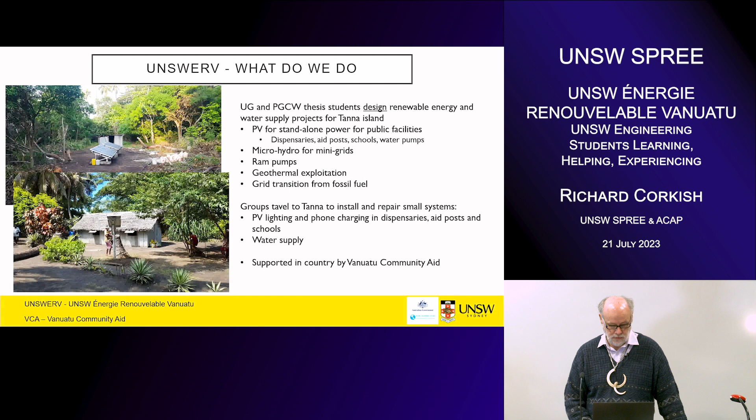And we've dabbled a little bit in the hopeful future transition of the diesel-based grid on that island away from fossil fuel. So I'm going to give you a bit of a slideshow, really, lots of photos and not much words about what we've been doing over those years.

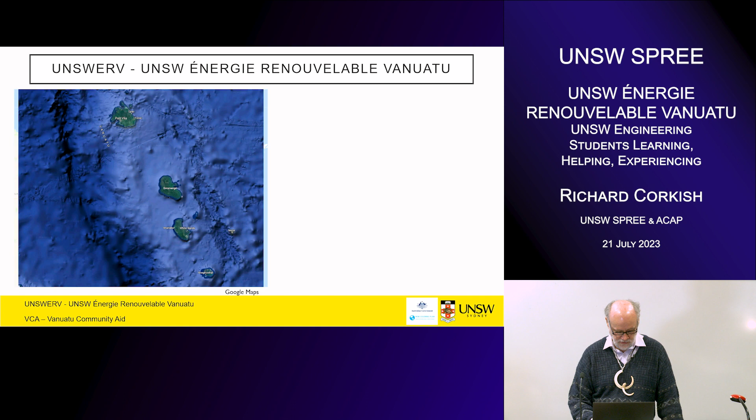So the island we're talking about is up here in the Pacific, Vanuatu is sort of between New Caledonia and Fiji, about the same latitude as Townsville, where Tanna is. That's the little island - this kidney-shaped island at the bottom here. We've got here on the west coast, much drier than on the east coast, because the prevailing winds bring lots of moisture to the east coast and particularly the southeast of the island, so it's very wet there.

The grid is only on the west coast, and most of the island has no electricity grid at all.

This island is 40 kilometres long by 19 kilometres wide, 550 square kilometres in area. The highest point is in the southeast of the island, at 1,084 metres.

Those prevailing winds I mentioned come from the southeast and bring lots of moisture, which gets dumped around that mountain, around those mountains really, and a rain shadow forms on the west side.

Very beautiful, we love to be there. It's just a glorious place to be. It's a South Sea island paradise, but it has its issues.

The sort of projects we've been doing is illustrated here. This is our students putting second-hand solar modules on the roof of an aid post in one of the villages. That village is Saka, I think, from memory.

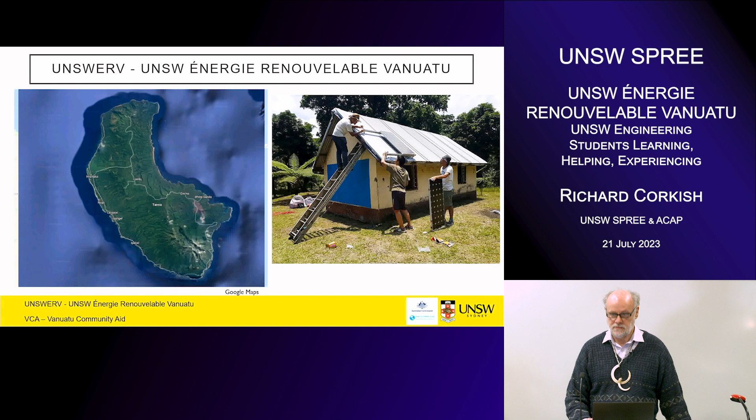So avoiding complex electronics like inverters is wise if we can do it, and so we can do basic phone charging and lighting without going to AC and high voltage. It's also intrinsically safe as well.

I think I've already done that bit. Another aid post.

We get into the local culture as much as we can. This is a festival that is only held every 5 or so years, comes with little notice to us in the West, but it's very exciting, a 2-day festival that is as colourful and as life-filled as you could dream of. We climb the volcano, have a look inside.

That volcano's gotten very excited in the last few years, and it's been quite devastating to the communities who live close to it, because it's been dumping ash on their gardens. Malnutrition has been an issue, along with all the health problems that go with that.

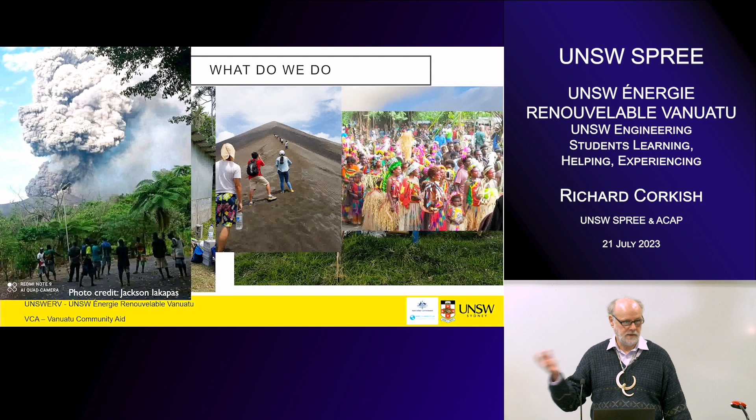It's driven a lot of families to move to Lenakel, the main town, in much bigger numbers. So it's sort of driving people out of the rural villages.

So we engage very closely with the local community, and we make good friends. And primarily what happens through this is the students learn. Through that engagement, they also learn to get their hands dirty, to build things with their hands, and they learn to experience the pride and joy of making something work that's really useful to people.

This is our first project, back in 2007 and 2008, in the little village of Lowen. You can see we put roof guttering for water supply, some tanks, and over here a PV module, supplying a lighting system. That's a project that was started by Anna Bruce, and I sort of picked it up and took over it.

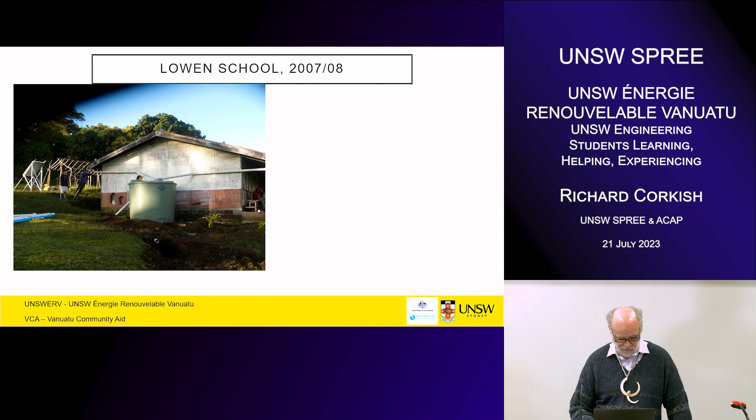That PV module lasted quite well until 2015, when Cyclone Pam was unkind to it, and we've since replaced that lighting system with an upgrade. The local people were very appreciative, and we had a little ceremony at the end there.

From that we asked around and made some more contacts. We'd been introduced by Mary O'Malley, who used to work in the media office in the Chancery here, and she'd had a lot of experience on this island and had a lot of good contacts, so she was able to introduce us to people who allowed us to learn about projects and learn what was needed.

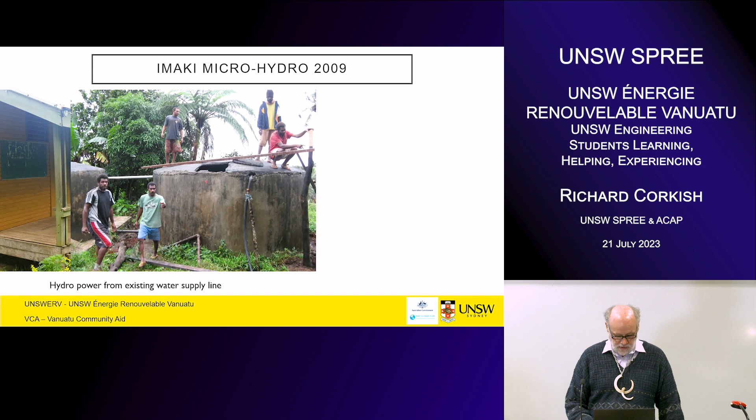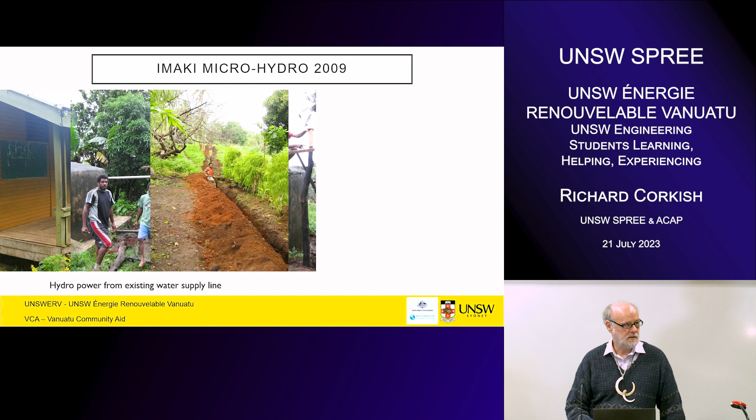So he and his colleague the following year, Eden, who's also active in 5B, they built a hydropower system, and that gave 24-hour, 7-day a week power with no nighttime shutdown. So a small battery is a big advantage of that over solar in cases like this.

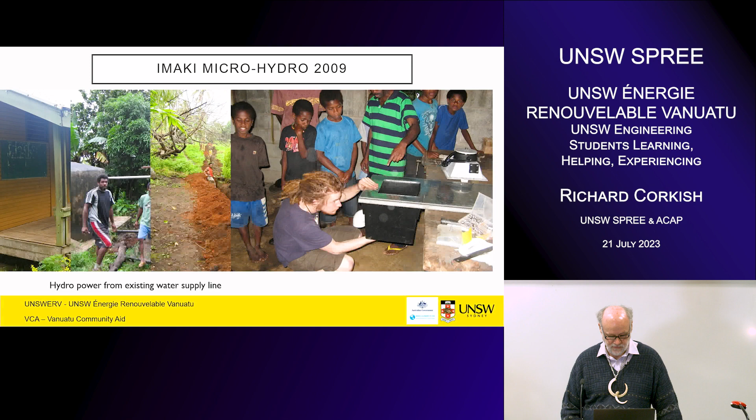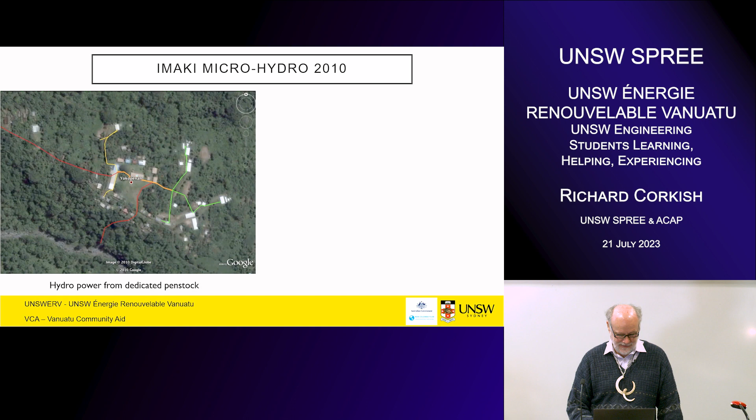That worked very nicely until Cyclone Pam. So they built a mini grid based on that hydropower, distributed to the two schools, the secondary school, the primary school - and really, just an aside, that secondary school has got to be the most beautiful campus of any educational institution in the world, it's just lovely - the medical clinic and the nurses' quarters as well, and a couple of other places. So it made a big difference to that place.

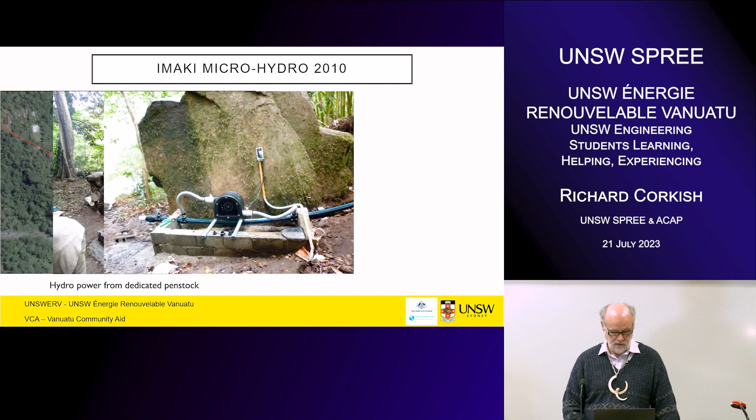So Eden came on the next year, and they actually did a different, slightly larger hydropower system that wasn't dependent on the existing water supply line. They put in a dedicated penstock, and that's the turbine that was running from that, and the water that comes out of that turbine was just returned to the river. So that's just below the village.

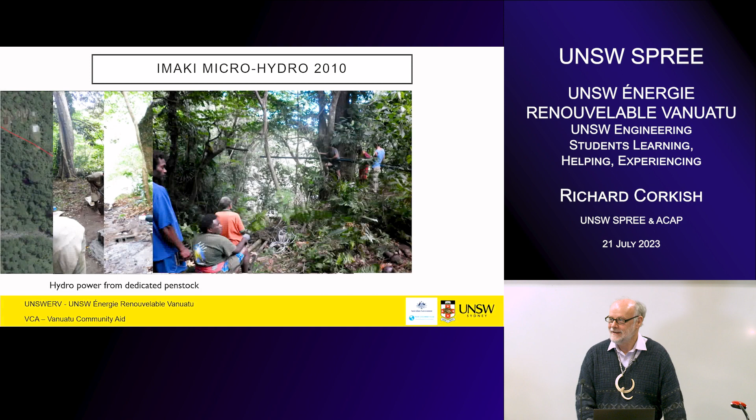So here we see installing the pipe over a chasm, one of the many chasms along the way. Very rough country, very difficult country, but it went very well. So there's Chris and Eden, and I hope they remain very proud of the great job they did there.

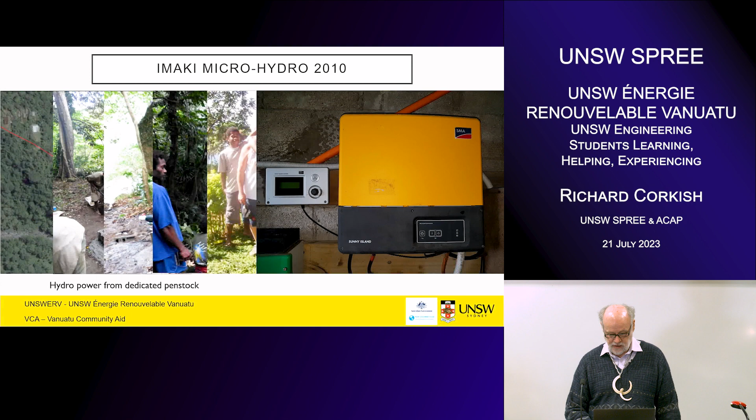So those SMA inverters have been through hell, really, with cyclones and unroofed buildings, and still we're hoping next year to put them back into service in another place.

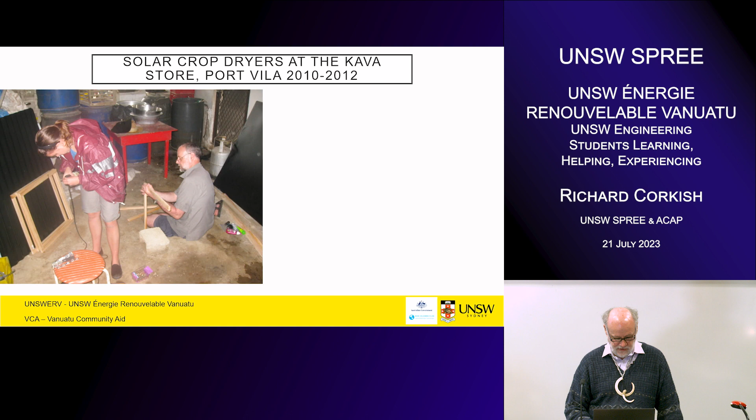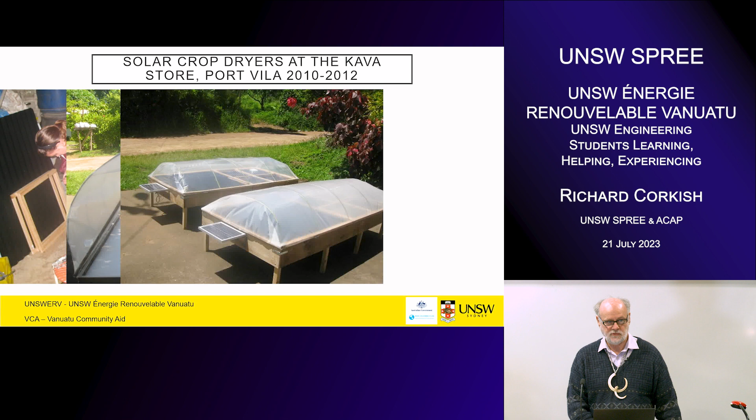This is me and my daughter then - my daughter is still my daughter. We were doing solar crop dryers in Port Vila, now on a different island - the main island was our next project, which we did in 2010 through to 2012 with a master's student. That's my daughter there. So we built two solar crop dryers that were used by one of the businesses there, the Kava store, to preserve local Pacific fruits and nuts.

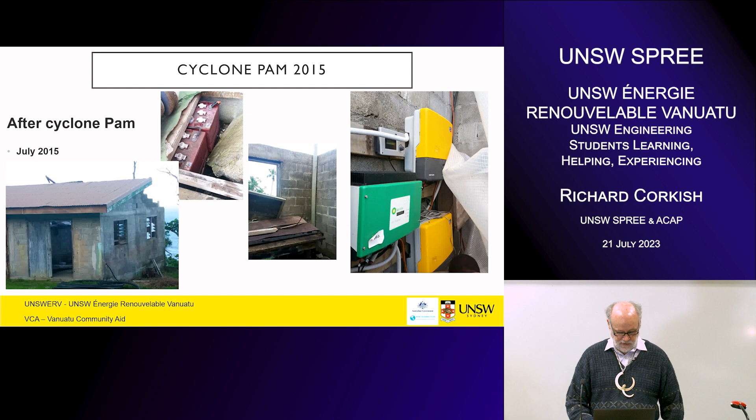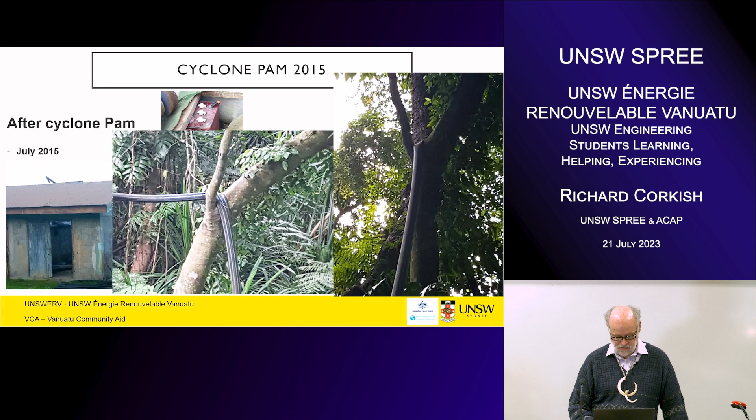It lost the windows, lost the roof, rain over everything, and the hydro was not working for several years after that. It put trees down over our pipe, so we did a survey there a few years later, and I think there were 13 damages to the pipe that were all very serious. It got to the point where we thought we'd have to completely start again, and we struggled to find the resources to do that. There's our penstock that used to be strung across a valley, but now it's just broken.

So set that aside. We went back to doing the lighting in dispensaries and aid posts again. This is at Iquaramanu, just on the south side of the volcano. I used to really enjoy getting water out of that particular water tank because it's very crisp, sharp, cold water, nice in summer—until I found out it was actually full of acid from the volcano, which gives it its crispness. So I suddenly stopped drinking that.

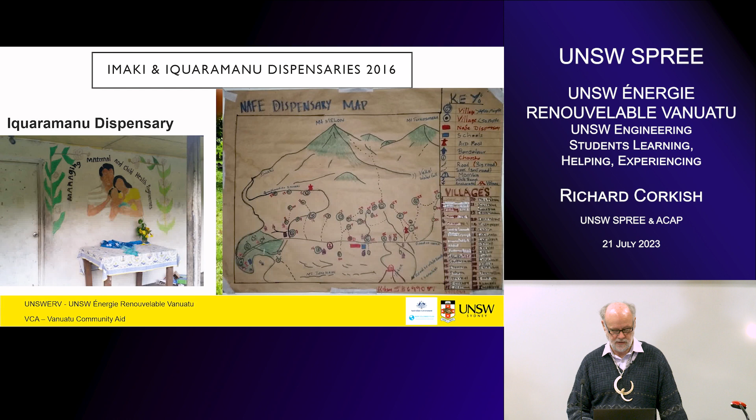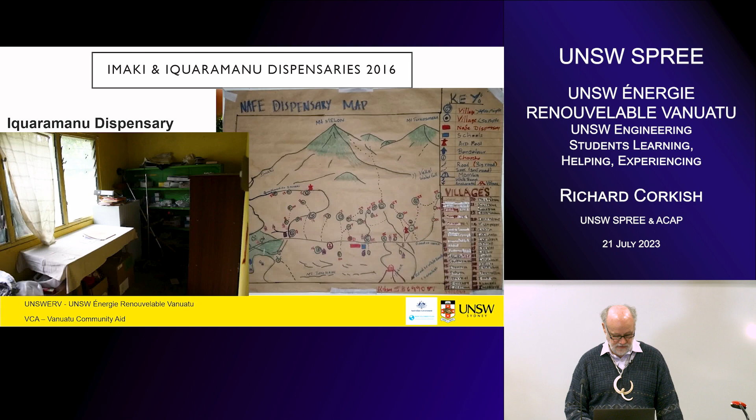So the community came together there. That's worked for many years with our lights in that building. That's the map inside that building showing how they keep track of the villages they service and where people come from. People come from many kilometres away to get health services and to have babies at that dispensary. But it's not a very well appointed place—it's very basic. Lights make a big difference.

Another one on the south coast, Quaraka. This is the common sort of building we're seeing as the village aid post. It might have a concrete floor—that one does. Sometimes they have dirt floors, but very basic services. So here's a picture on the left of one of our students installing a distribution board for our DC supply, 12 volt DC supply for lighting and phone charging there.

That's the building there amongst all the coconut trees, right on the coast—absolutely blissfully beautiful place. So that's us walking along the beach to the local creek so we could have a bath. There's lots of scenic benefits at the place.

We've done some training of local people a little bit, as the level of mathematical knowledge and understanding is quite low in the community, but it's getting better for the younger people.

So we've taken some second-hand solar modules that we took off a school, donated from a school in North Sydney, and we've shipped them across. That's our sort of bread and butter for our projects—we're working our way through them as we do projects. So that's in 2018, and we've still got a few of those left.

So at Imaki School, we did some basic testing of those modules to check them after the shipping, because the shipping can be a bit rough on them, and we got the students involved in doing that.

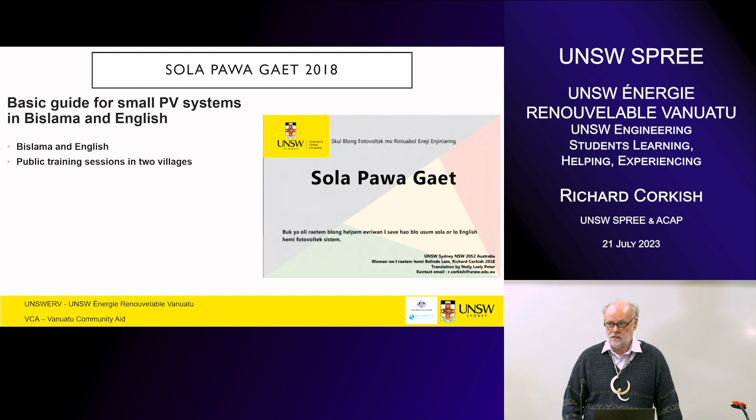One of our students, Belinda, developed a solar power guide for the local people in Bislama, the local language, and in English. This addresses some of the very basic issues.

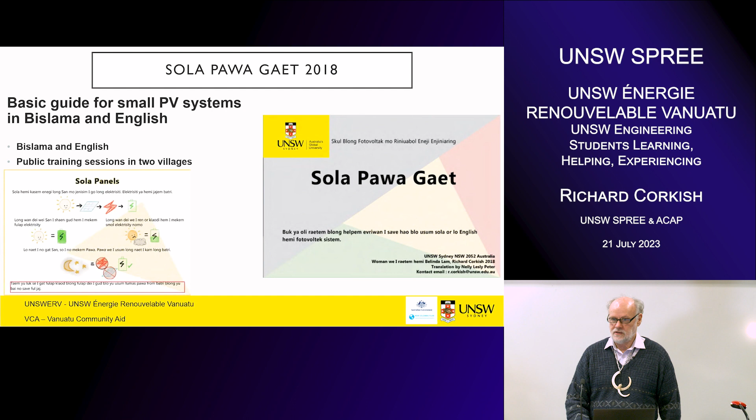There are lots of little privately owned solar power systems, but they tend to not be installed very well or optimally—the wiring is too thin commonly, and there's insufficient understanding of what's needed to make them work well. There's also an expectation that you can't do anything without an inverter, which we're trying to undermine by promoting our DC systems. So we're addressing those basic understanding issues—what does an inverter do, and when do you need it, for example.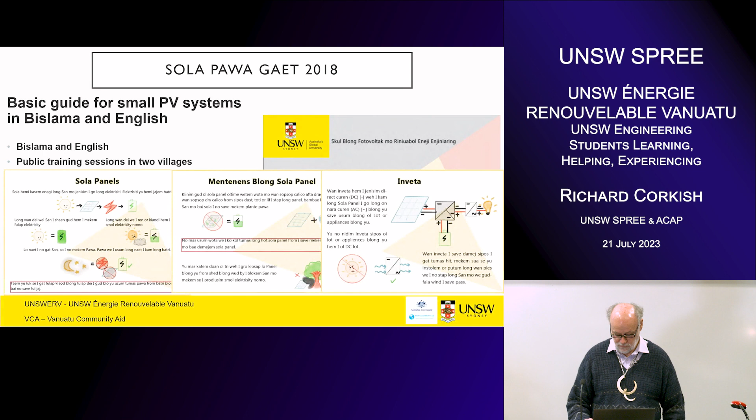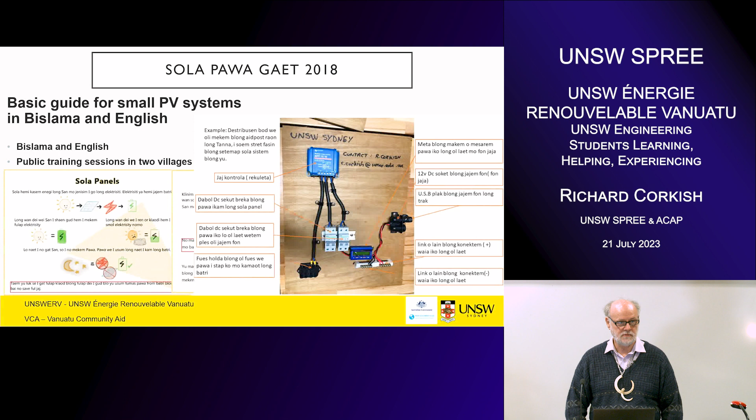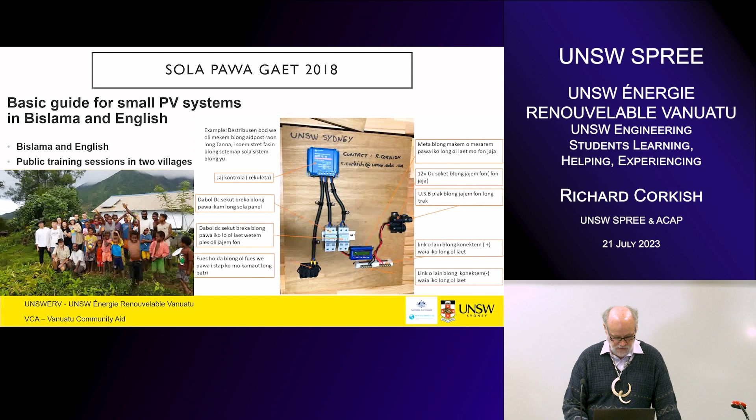That's one of the little boards that we make here now at UNSW. We ship them across and install them—we prefabricate those here. That's presented in both Bislama and in English.

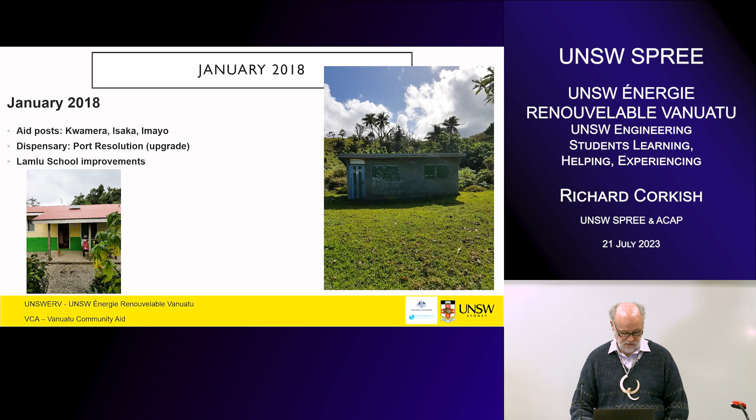Back in 2018, some more aid posts—a dispensary at Port Resolution. We've seen that picture before, I know—and a school at Lamlu as well.

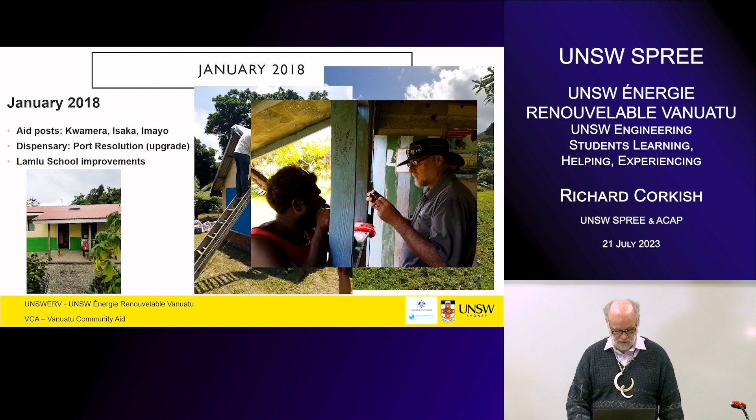Lamlu is one of the Catholic mission schools in the middle of the island that we've been doing a lot of work on, and had lots of goes because our budget has been too limited to do what we really need to do. So we've been working little bit by little bit, classroom by classroom. We've seen that one before too—this little picture here is at Lamlu School.

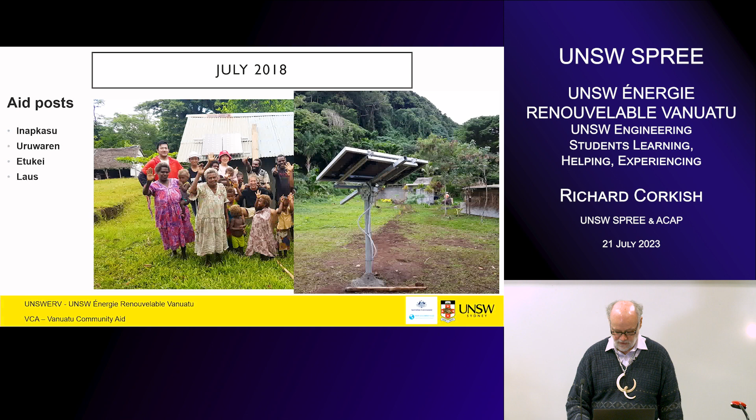More aid posts later on. So this one here, we needed to—this is right on the south coast of the island. We couldn't do the cheapest option, which was to put the PV on the roof of the building, because of this mountain in the background where the sun is blocked out until very late in the morning each day. So we had to find a compromise location that was a bit less shaded. But getting the hardware for the mounting systems there was incredibly challenging and expensive.

Another aid post, that's Etukei, right on the very eastern end of the island, and this is Laus, which is right on the northwest of the island, the very far side. Over the years we've made lots of friends and got very engaged with the community. Our work, although very small and low impact, has been much appreciated by the local community.

Back in January 2020, that was the last time we went before we had a bit of a break, we had a ceremony where we were honoured and effectively included in the local community in a way that was very honouring. I'm wearing my tusks, a great honour given by the community. I don't get many chances to show them off, so thanks for coming.

Our students were included there too. Also included are some Peace Corps volunteers, American Peace Corps, with whom we've had a history of engaging and sharing information. They are just now coming back to Vanuatu after the border closures of the past few years, so we're hoping to re-engage with them and do things together.

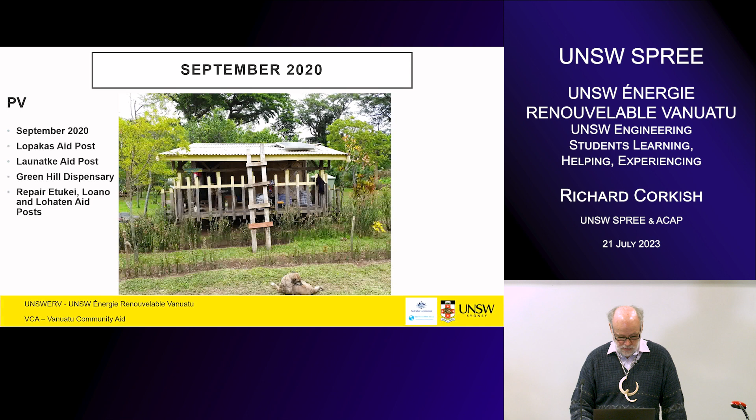We have a great time, we really enjoy it. The students just revel in it. It's tough and dirty, but it's a lot of fun.

We had the support of a couple of guys from a solar installer company from Brisbane, and they did what I probably couldn't have done, getting that going in a day. They worked like Trojans in the heat and dirt, and eventually in the dark, to get the pump going to the point where we thought it was working, but there wasn't any sun left by the time we fixed it. So we waited on tenterhooks until the sun came up in the morning to see if it was actually going to pump water, which it did. It was very sweet.

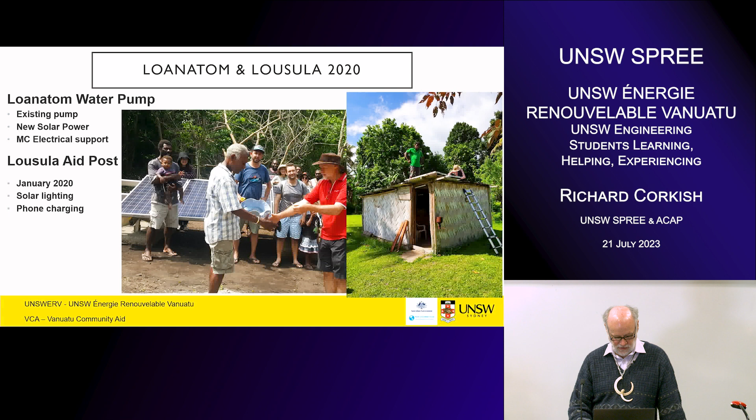That little building is the last aid post in which we put lights before the border shutdown from COVID. It's probably the cutest aid post, in a gorgeous little village.

That's out of order - that's back at the middle area hospital. After Cyclone Pam destroyed the hydropower system at Imaki, we were a bit stuck. When we looked at what we'd need to do to repair it, we'd need to replace pretty well everything and start from scratch, building everything stronger as well, and that was just way beyond our budget.

So instead we tried to replace the hydro input with solar input, since we had the modules. We made a good start on that, getting as far as having this one rack of PV, with a second row planned to feed into the same inverter as well.

That old SMA inverter I showed you before, we had a lot of trouble getting it communicating. We had some parts missing to allow the communication, and it had no keyboard, so we couldn't actually set it up. It was very frustrating. We've got a workaround now, but it got pushed aside a little bit, which is a story I'll tell you in a minute.

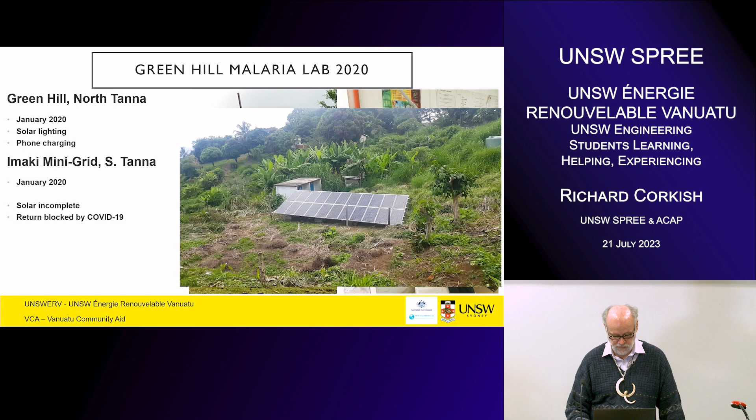Another organisation came in to help there and rebuilt the hydro, or built a new hydro. So that solar is now feeding into a hybrid solar-hydro system.

The borders reopened in July 2022, and I'm not going to go through all the little things, but we had lots of repairs to do, as lots of things had gotten out of their best condition, I think.

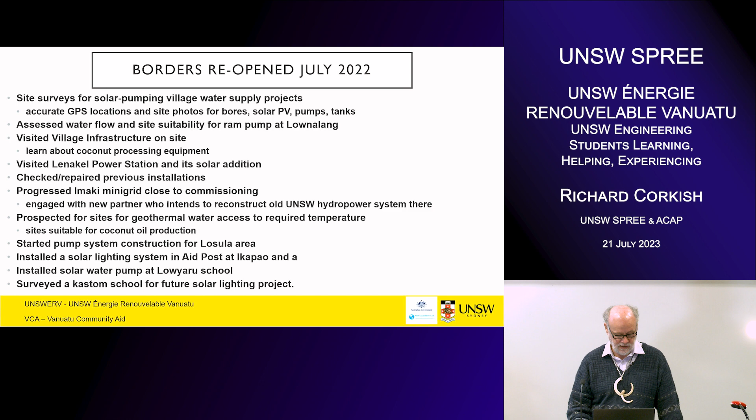Our interests had changed a little bit too, so we're much more focused on trying to do something about the grid, because this country is intending to be net zero by 2030, I think. But there's a lot to do to get there, and the diesel-powered power stations are a big part of that problem. So we've started to have a look at that as well. We've had lots of the same sort of projects, with a mix of geothermal coming back into the fore, lighting projects and water supply projects as well.

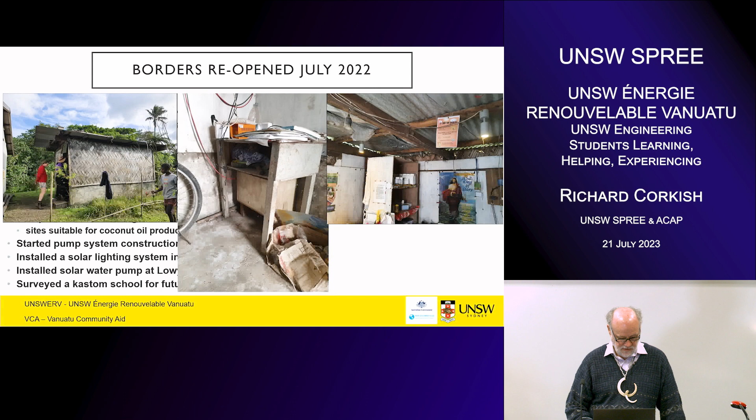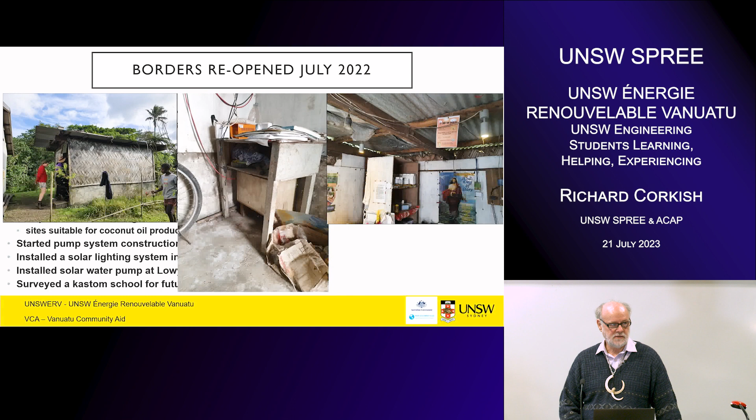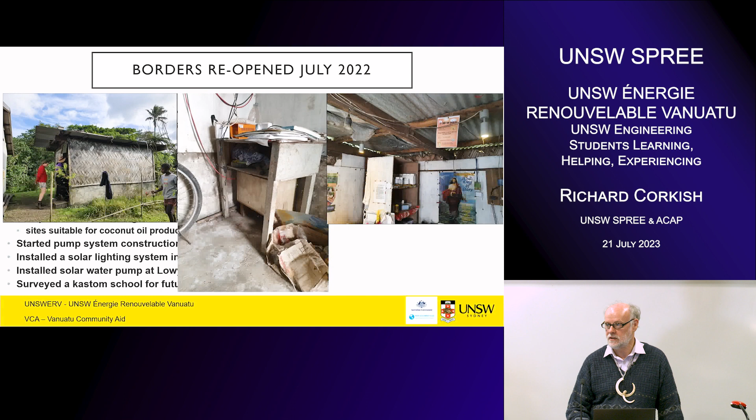This little one is one I'm very proud of. This little aid post has had - I can't really remember when we installed that, but it's been many years. They've looked after it very, very well. We do get problems where people borrow the batteries at night and take them away and do other things with them, and the batteries have degraded. But some of the villages have been amazingly careful, and we're looking for ways to encourage and support them.

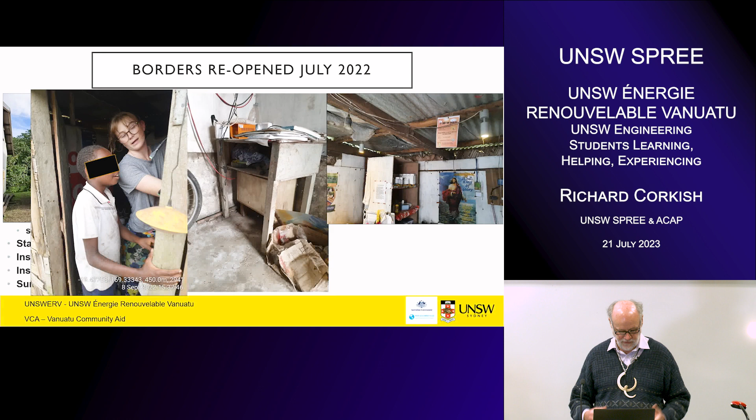I'm told I didn't get permission from this little boy to show his photo, so I've got to put a big black spot over his face. But the children in that village just mobbed us. The aid post was just full of children wanting to get involved, and this little guy particularly was very keen, very enthused by the possibilities of what we could do with solar power and electricity.

After the borders reopened, one of the projects we were interested in was trying to explore the geothermal. If you stand on the top of that volcano and look in, you can see magma, so there's immense heat available. But making it accessible and finding those sweet spots - places where you might do, for example, coconut copra drying for oil extraction - means finding the right place that's feasible, accessible, and at temperatures we can reach that won't hurt people accessing it, but still effective enough to do that food dehydration task.

This student's very happy that we actually got 80 or so degrees there, and the location is right on the beach - it's hot water that comes out of the rocks on the beach at Port Resolution.

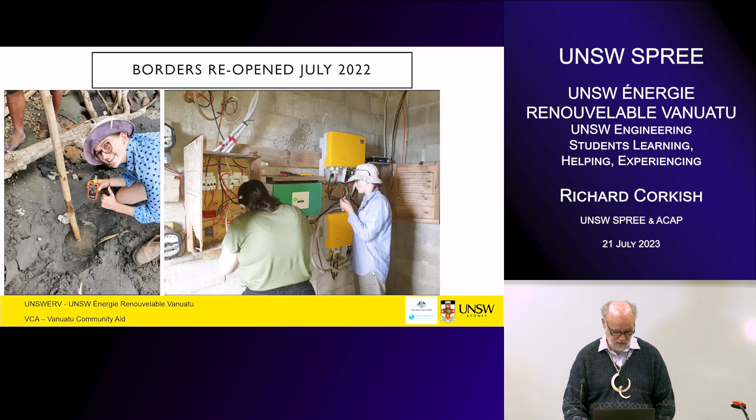That's working again on the Imaki solar system - I'm trying desperately to get that going, but we didn't quite do that. That's the inverter for the water pump system on the other side of the island. And this green picture here, with the student in the hat, we're measuring the water flow for an intended ram pump system. A ram pump is a very sweet technology - it works without any electricity input. It uses the water hammer effect and the flow of water to pump a small fraction of that flow to a greater height than it originally came from.

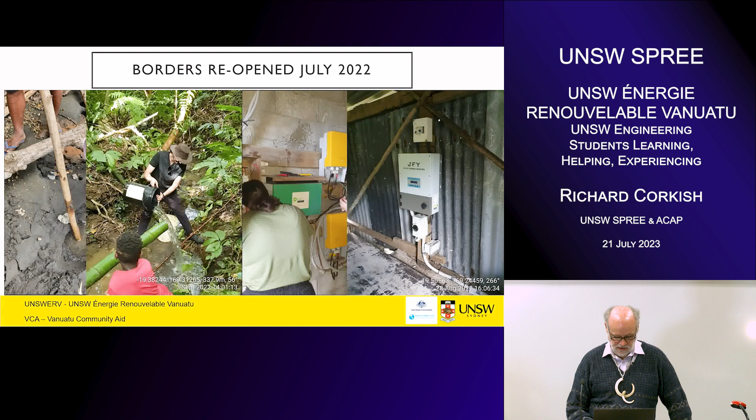We're trying to get water out of this dark valley. Solar pumping is quite feasible, except that there's no sun down there, so the photovoltaic modules would need to be at the top of the hill in the sun, and the cables that would have to come down to the pump are quite a challenging expense. So we're still struggling with getting that right. We did install a ram pump at that location, but then two cyclones came last year and were very unkind to it.

This is Imaki village on the southeast of the island, where we did that hydro power system before, and that solar array I showed you. This installation was done by Eco Generation, a New Zealand company, with funding from a US donor, and they have really done hydro very, very well. They're very expert at it - we're very amateur, we do our best, but they do it very beautifully.

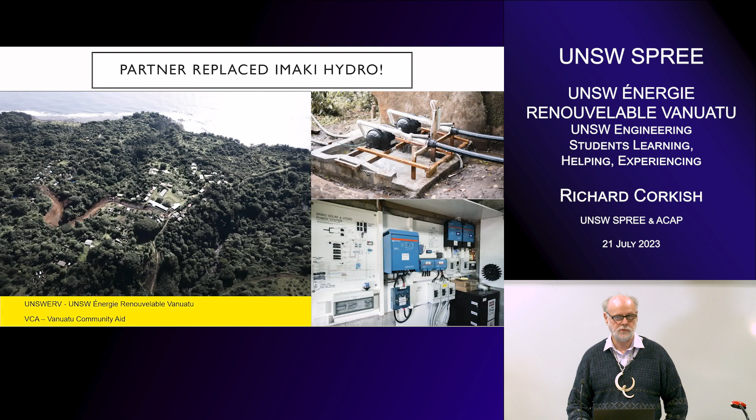They've incorporated our solar array into their hydro - the solar that I showed you before has been incorporated into their hydro input. So that has a hybrid hydro-solar power supply for that village, and it's very well supported with electricity supply now. We stay in contact with that company, and we're engaging with them and trying to find ways to do more things together in the future. So that's our solar array that is supporting that hydro as well.

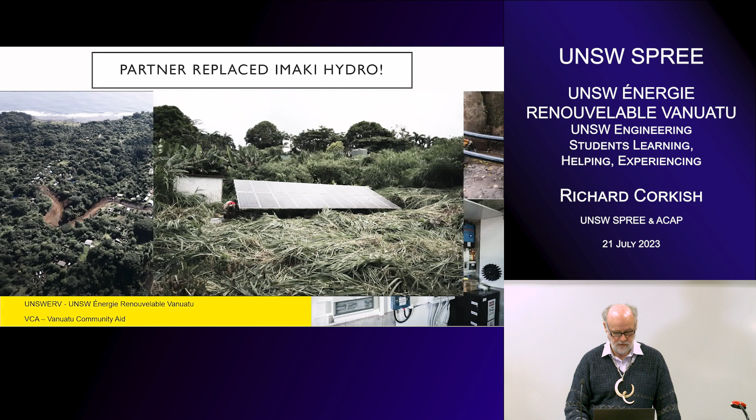I'm not going to go through all of these, but this is our project in January '23. We're working on the hydraulic ram pump, and bore pumps for simply pumping water out of the aquifer for water supply at schools and villages.

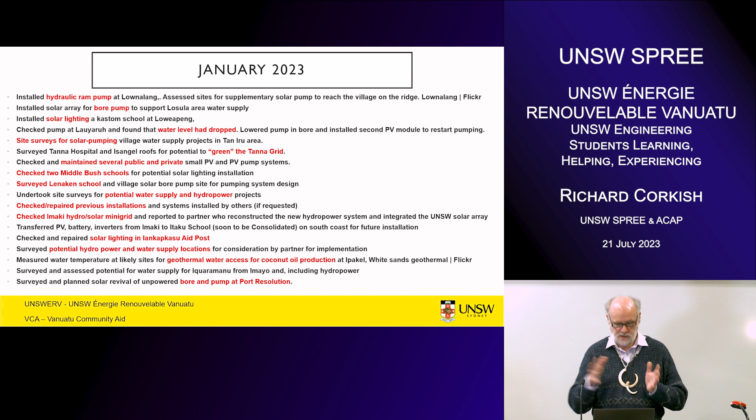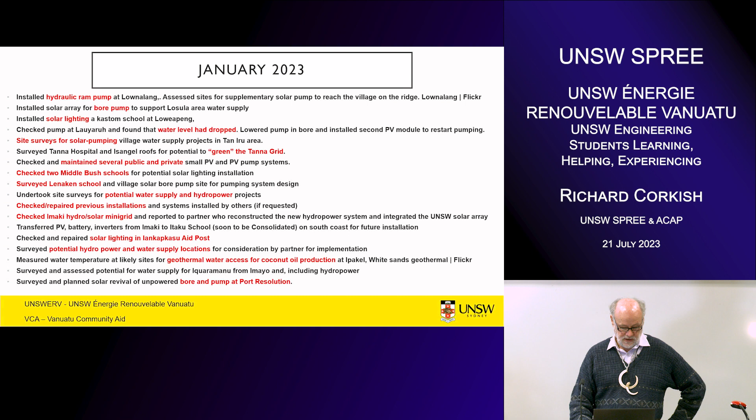Doing lots of site surveys. Coming back after the big break, we didn't really have a bank of projects ready to go because we hadn't been going. Normally when we go, we both work on projects planned in the past, and we also do planning for future projects. We'd had a big gap, so we couldn't do that future planning, and we had a lot to catch up on. So a lot of surveys, checking, measuring and data collection, with a bit less actual doing than usual. But also checking out the geothermal resources, which I think we still need to learn more about.

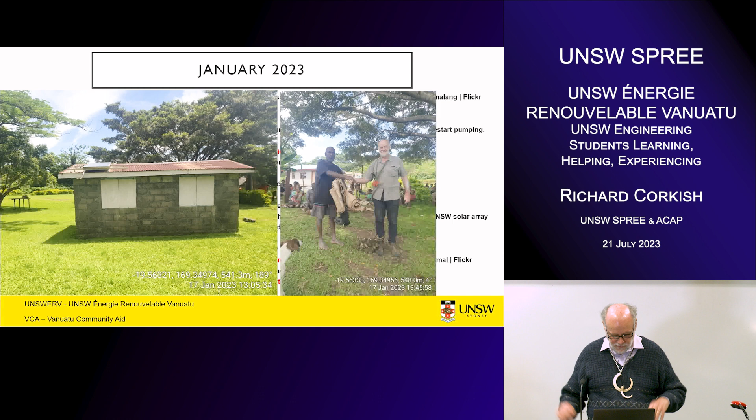We went back to a very remote place we'd visited many years ago, and put the lighting in this little health clinic, and found it was still working perfectly after all those years. That community had been very careful - they hadn't used the power for anything else other than what it was meant for. One of the light switches had broken, but we were able to replace that. The external light hadn't stood the climate as well, but we'll replace that next time we go.

So we're currently doing - I have a student now who's doing planning for a hydro power system that might be implemented by another organisation, which would supply that health clinic and the school in that village as well.

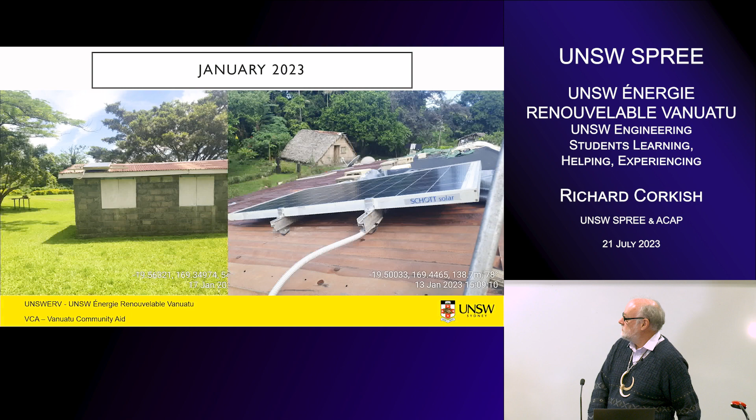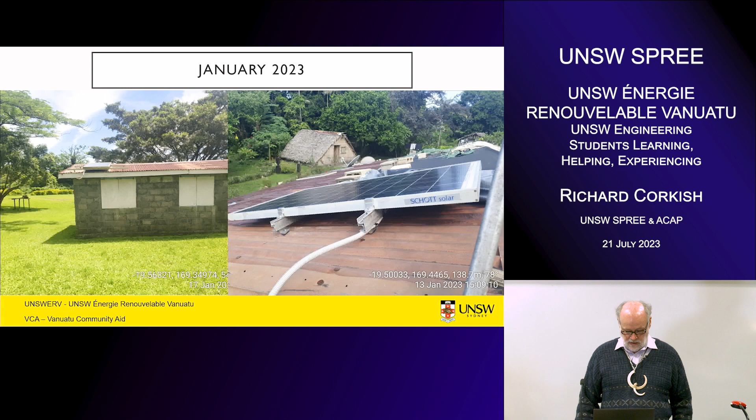So this building here, the grass roof building, is a school - a custom school where community members teach the children about the traditional ways of life, the old ways. We've put some, not old ways, but very modern LED lighting in that building, with the solar on the adjacent residential building.

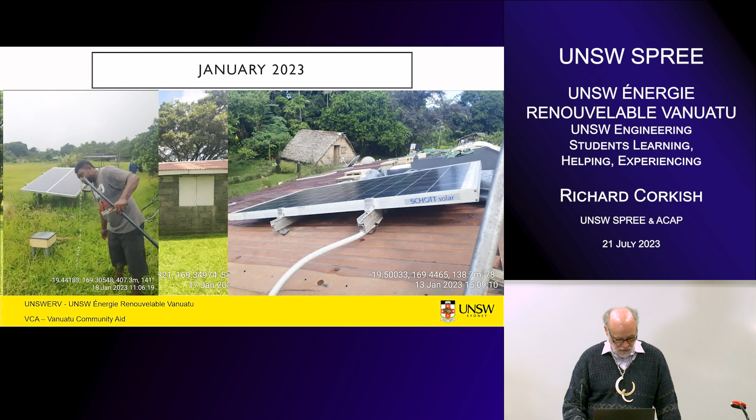And we've done a water pump that we got going at a school in the centre of the island, with Jackson just testing that the water's okay. This is back in January '23, so we haven't been back since then.

And this array is for another water supply - water supply from the bottom of the mountain for villages which are about 90 to 100 metres elevation. We're not actually planning at the moment to pump all the way up there, but at least pump the water out of the ground to avoid them having to drive down with water containers and hand pump the water out of the aquifer, then drive back. At least the pumping out of the aquifer will be done, and we'll get as close as we can to a good place where they can collect it more easily now.

So we got a bit stymied by a cyclone with that one - we weren't able to finish that project in January because a cyclone, a small one, only Category 1, came while we were there. We were safe, we had a good plan to keep us safe, but it did damage to the roads across the island. So some of our materials, particularly our pipe, were located on the other side of the island, so we couldn't go and get it. That remained unfinished, and we'll finish it when we return next month.